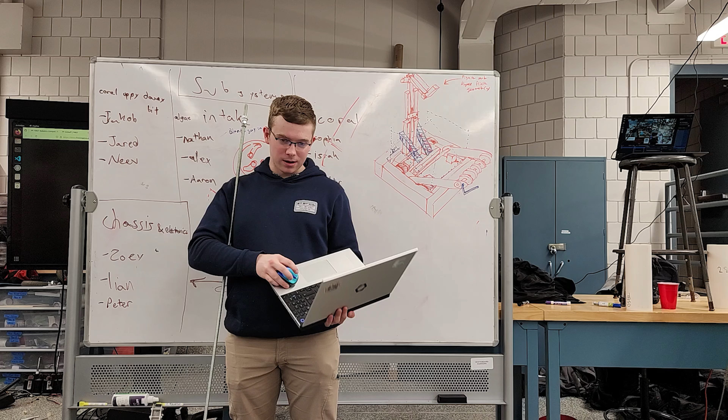Jakob doing the uppy-down elevator bit that we can use to manipulate the coral.

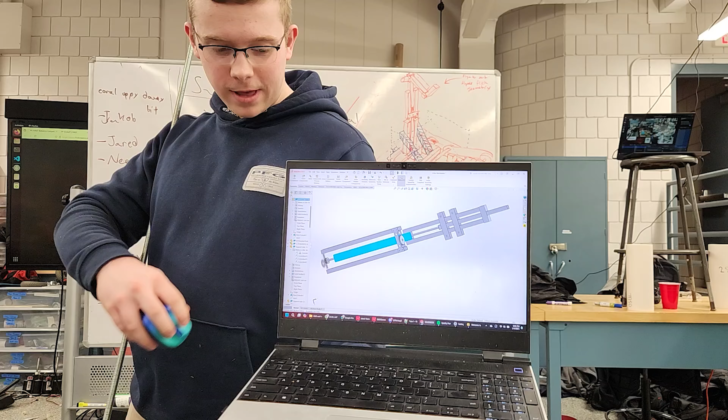So we settled on a lead screw design with this nice piece of all thread we found. With that in mind, it's going to be based around a couple pieces of aluminum tubing. It moves up and down. Let me manipulate it for you here. And voila, it goes up and down. It's a two-stage system, so we're going to have a Neo 550 driving the second stage and a regular Neo driving the first stage. And it's going to be great.

Off to the next guy.

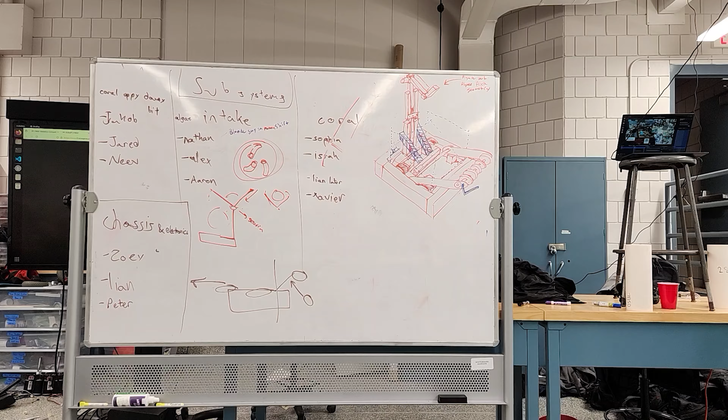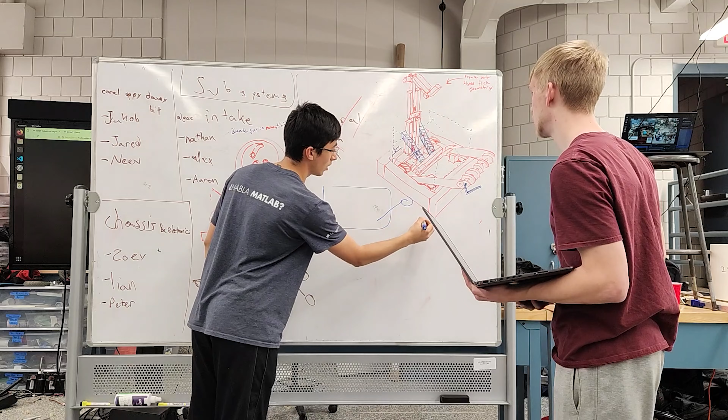Prototyping the intake sub-team. Our original idea that we first drew an hour after kickoff was to have the robot have an arm that intakes the ball off the ground and then potentially outtakes on the other side. But during some of our prototyping, we found that we can just use the arm that we want to intake the ball to also outtake the ball. We considered a few different pivot points for moving that arm, and also whether we even need to actuate the arm up and down. We determined the best course of action would be to both actuate the arm, and we chose a pivot point that worked best.

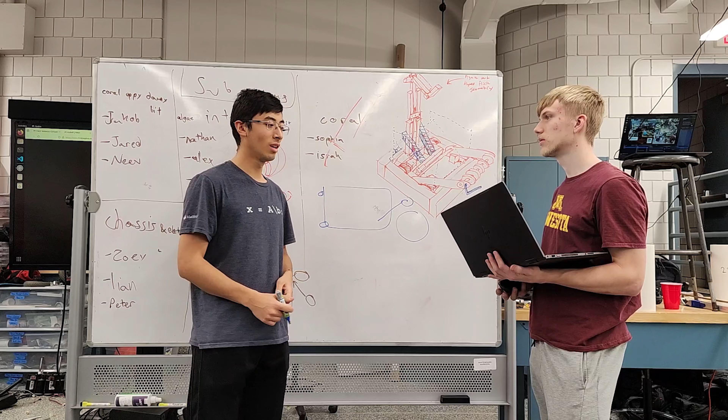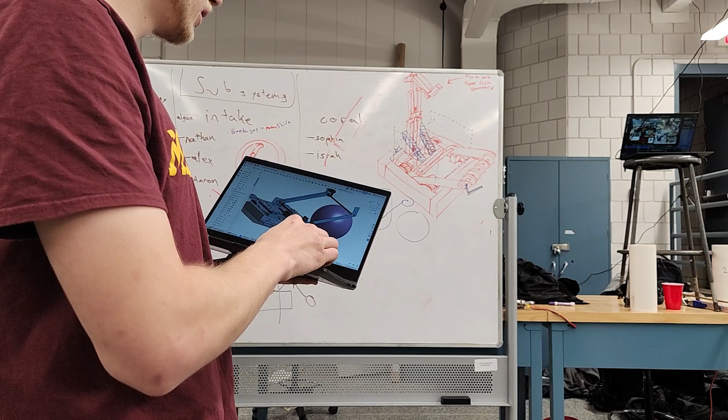And then Nathan can show the CAD here. Okay, so there's the algae, and our pivot comes down. It's basically a touch it, own it intake.

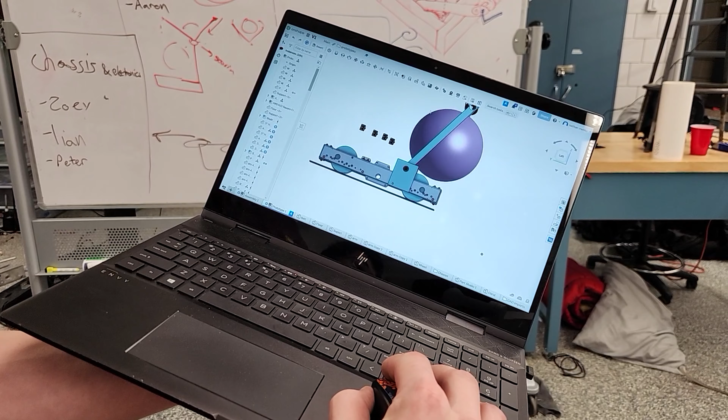You're going to need to go closer. We have big green wheels, not in the CAD right now, but you'd see it in the video. Basically this just comes down, it's spinning, and then it just comes into our robot. We still need to build out a ramp system, that's what we had in our video. Then it just sits there, and we reverse the wheels, and it scores out into the goal. We're starting our design for how we're going to make this move.

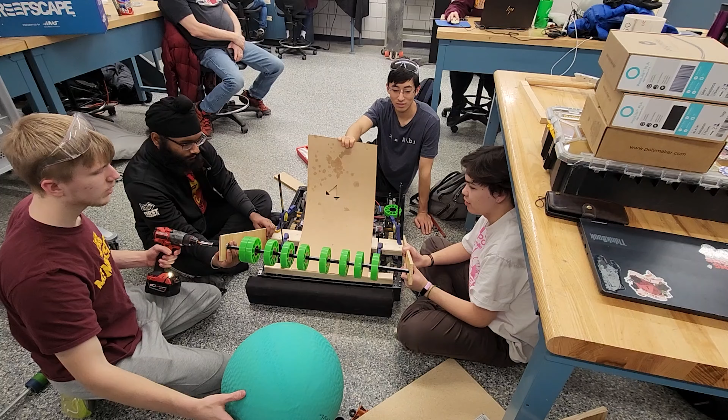This is good. Okay, and then this is the red dongle. Oh, that's plastic. Is that the right dongle for yours?

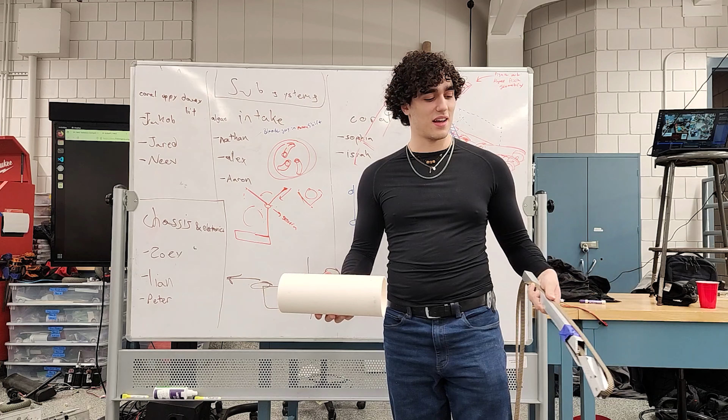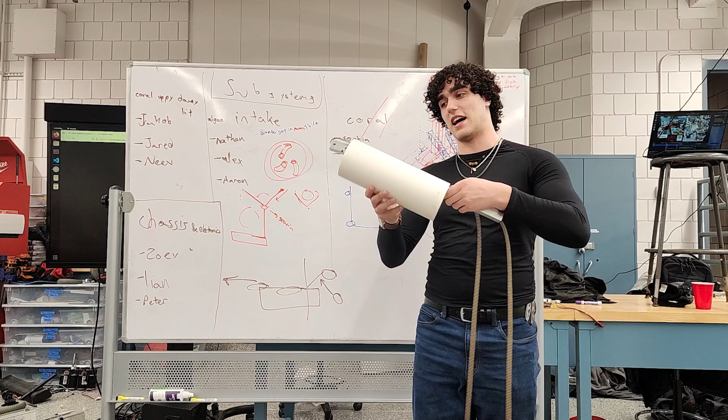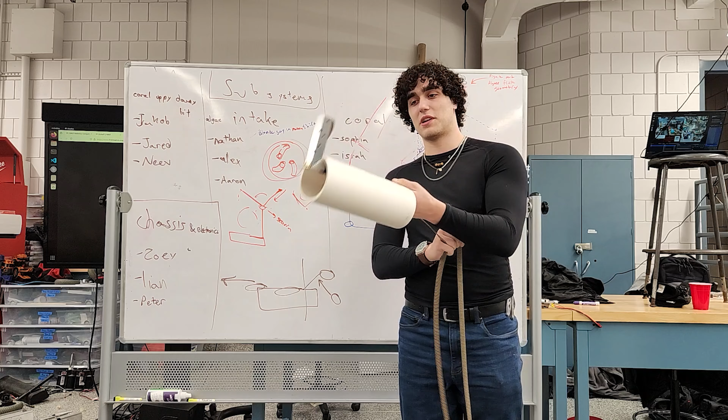No, so this was the initial prototype for the end effector. This was supposed to go on the end of the elevator mechanism. The idea was that it could initially grab onto the algae and then pull on this pulley here to actuate what we call the finger. This would allow it to have pretty secure control of the algae while it's moving around the field. We ended up really liking this idea. The only thing we were hesitant about was the whole string mechanism.

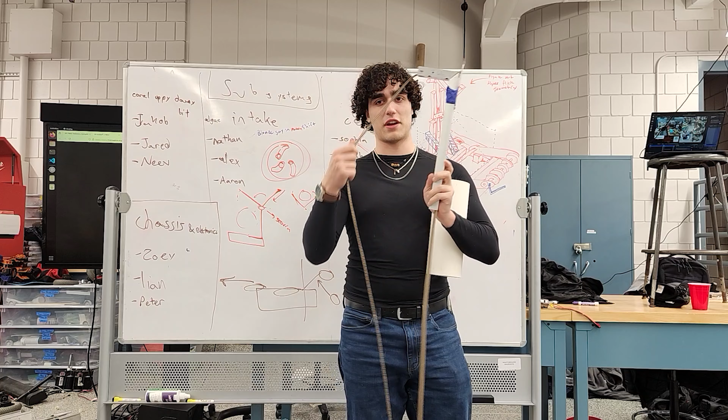So instead, the mechanism we're going for is adding a motor to pitch the entire mechanism on the back, and then a small servo to actuate the finger. So we did a lot of work on the CAD, and then I can present that briefly. Let me know if you can see this well.

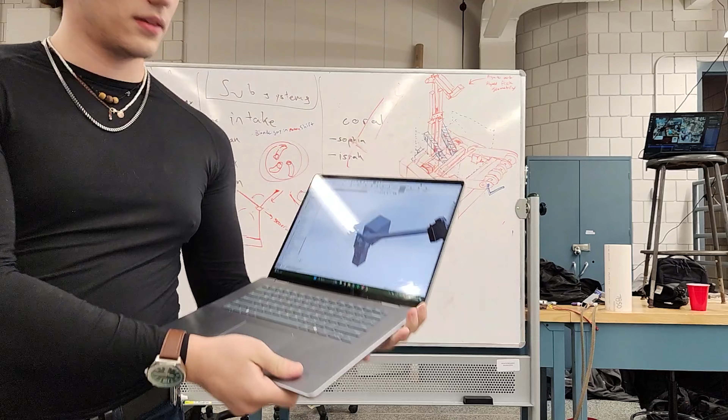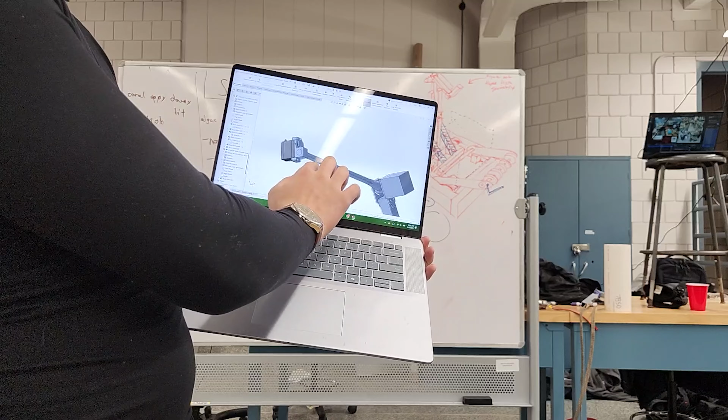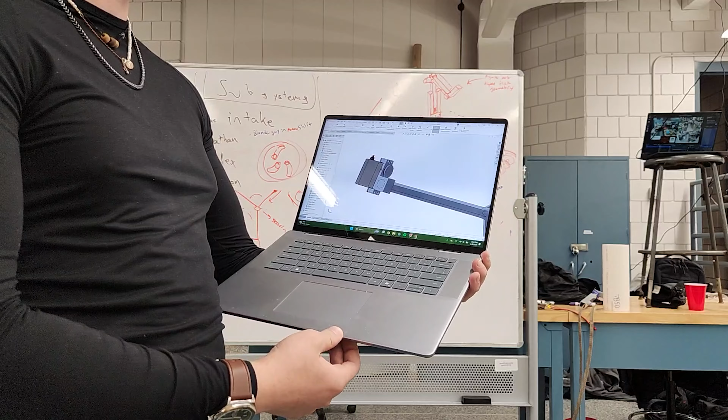We're using a Neo 550 to actuate this axle, and then we're using a 3D printed linkage to move this larger axle here. This is connected via linkage, also 3D printed, to this servo motor here. This servo motor is then connected to what we're going to make a 3D printed finger. Maybe this one's going to be a little more thematic. We're calling our robot Poseidon, so maybe like a trident of sorts. But yeah, that's the end effector so far, and we're going to 3D print it and see where it goes.

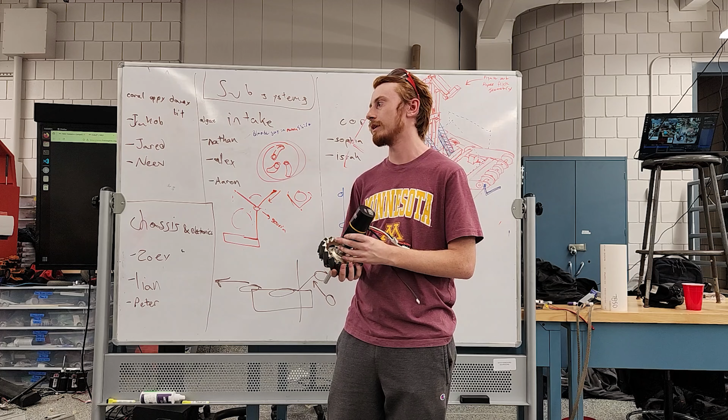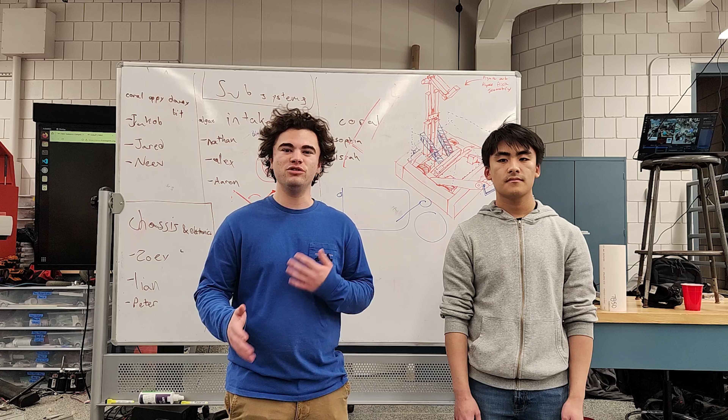Hello, my name is Anthony from the software team. In terms of software, one of the things we've been working on today is rewriting our drivetrain code for Mecanum Drive. As Jared mentioned, we're switching from tank drive to Mecanum this year, so we've been working on rewriting our code for that. We've also started looking into Path Planner because if we have time, we'd like to look into using it for autonomous paths.

Right now we're using an Orange Pi 5 flashed with PhotonVision, and we're using that with an Arducam. We're going to use April tags, just April tags, and we're working on software to tune it right now and see how things go.